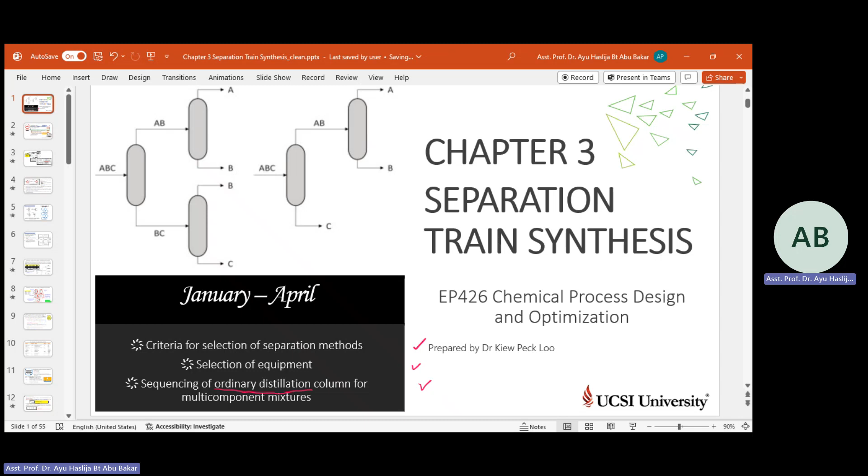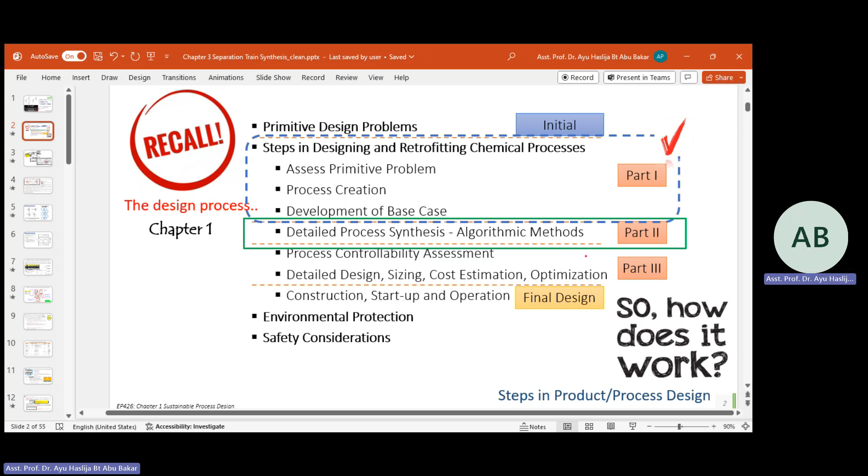Now, just to recall, we had done in previous chapter, part 1, part 2, the initial part and part 1. Now we go for the detailed process synthesis, which involves the separation part.

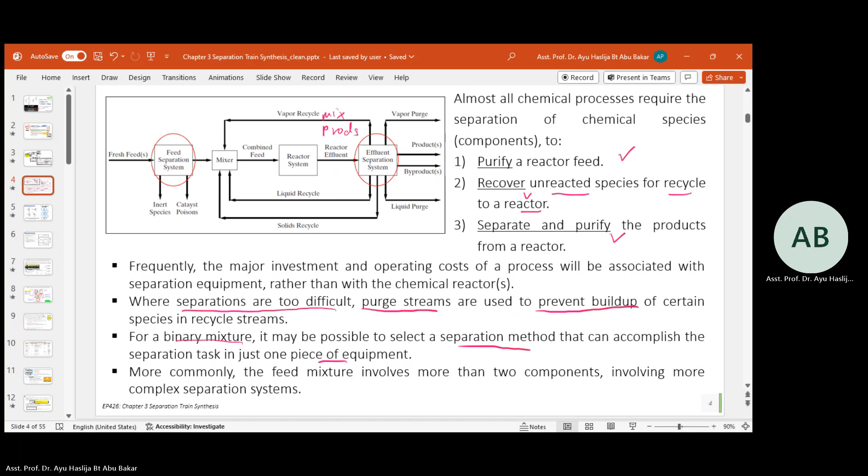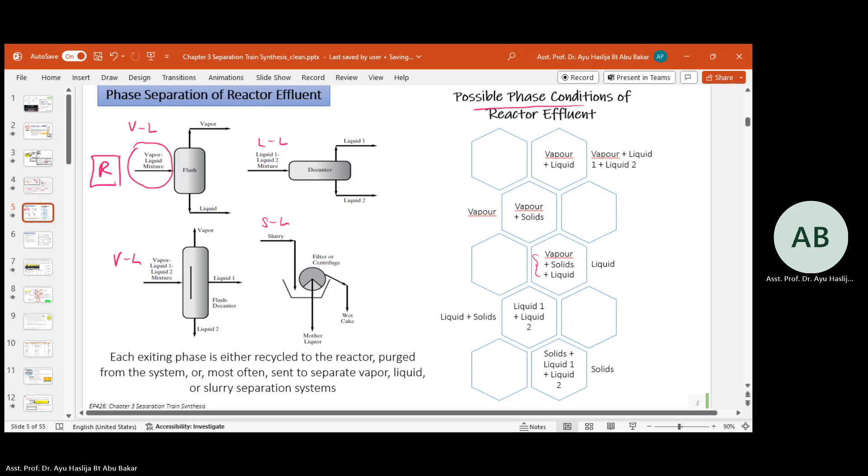Your PFD, have you sketched your BFD yet? Then so far, what is your product after the reactor, the phase? After your main reactor, the phase of the product - liquid, liquid, mixtures of products - liquid, liquid lah. Okay, so liquid, liquid.

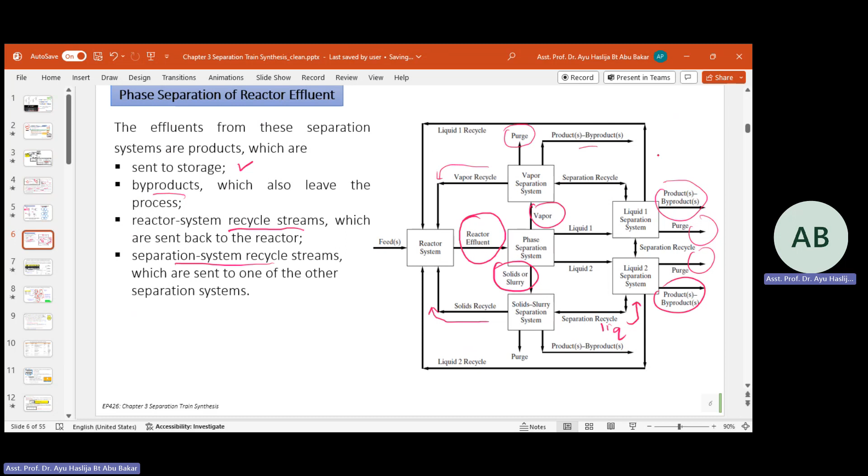So liquid goes to here - liquid, so perhaps here have mixtures of liquids. So after going through a few separation systems, you will have your products. As overall, this is your input, and all these effluent streams are your output.

Again, it depends on your effluent, reactor effluent phase. If you only have vapor phase, then choose the separation equipment that is suitable to separate the vapor.

Okay, up to there? Can I?

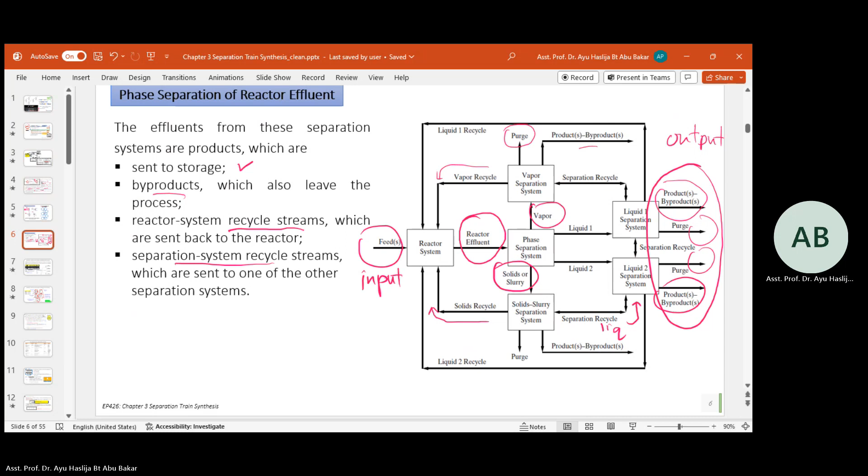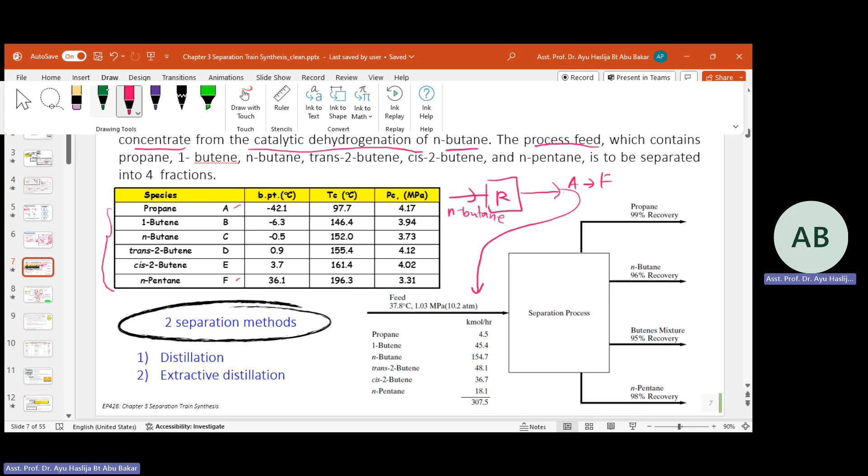Your main target is to recover the butenes.

Your mixture, you have a few: propane, 1-butene, N-butane - this is the unreacted reactant - trans-2-butene, cis-2-butene, and N-pentane. So your target is to recover butenes.

Means B, D, and E - butenes.

How many carbons in butenes? Four. Single bond, double bond. Double bond. Okay, butenes.

Now, target is to recover B, D, and E. Okay, here. This is the requirement from the question.

Now, how to separate them? You have 6 components in the feed with this rate, in kilomole per hour. Now, you need to find out the properties for each component in order for you to separate.

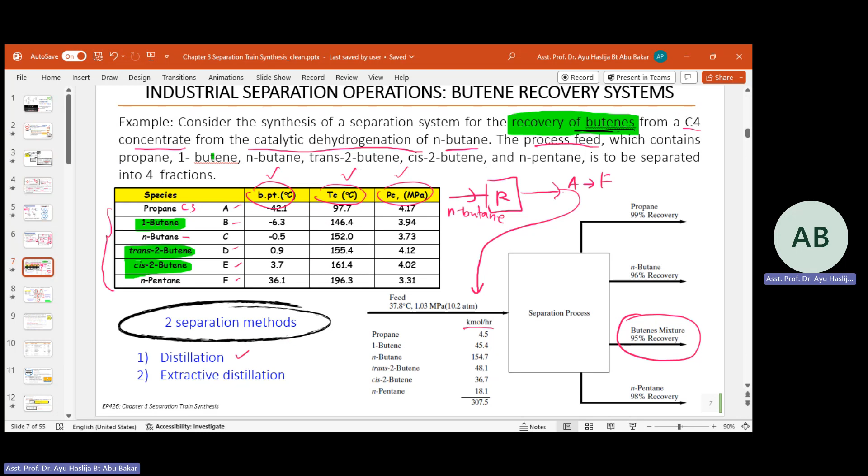Now, there are two separation methods proposed over here: distillation and extractive distillation. What are the differences between distillation and extractive distillation?

You have a few more types of distillation. But for these two, what are the differences? Okay. Which type?

Correct. Yes. Extractive is with the presence of solvent to help the separation process. Most of the time when it involves azeotropic or miscible mixtures.

Okay. Distillation, number one over there, is the general distillation system.

Okay, what are other types of distillation? Other types of distillation column that you know? What else, other than extractive?

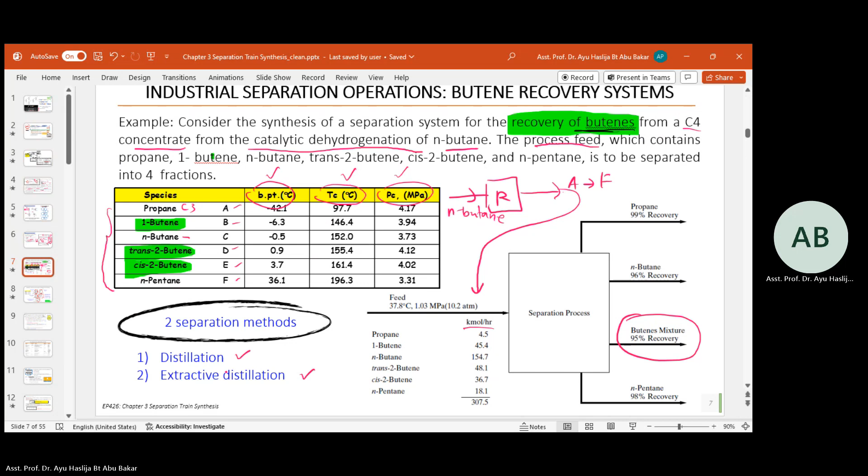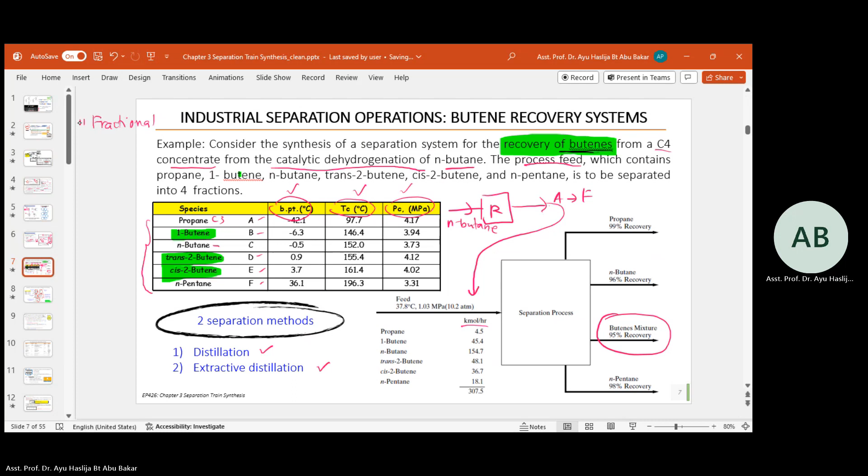Okay. Yes, fractional distillation. What else? Yes, reactive distillation, which we had gone through in previous lectures.

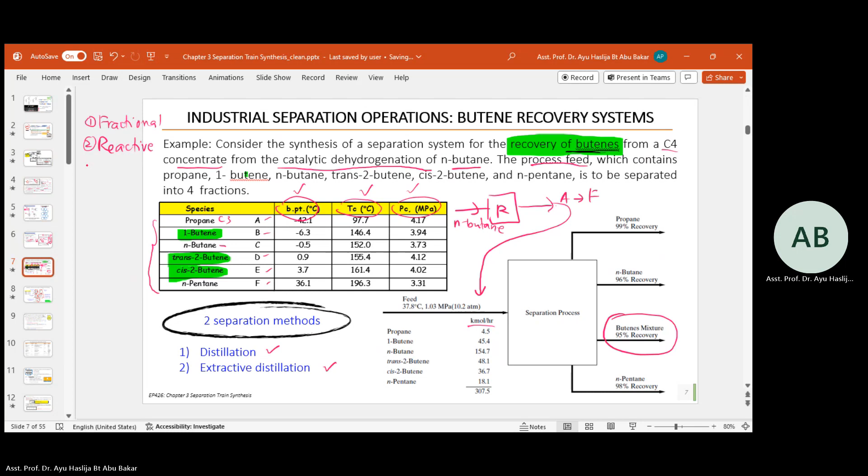Others? How about others? What type of distillation? No more? Huh?

PSA. What does PSA stand for? Pressure swing adsorption.

One kind of distillation, if you read through, it is one type of distillation as well. Sure.

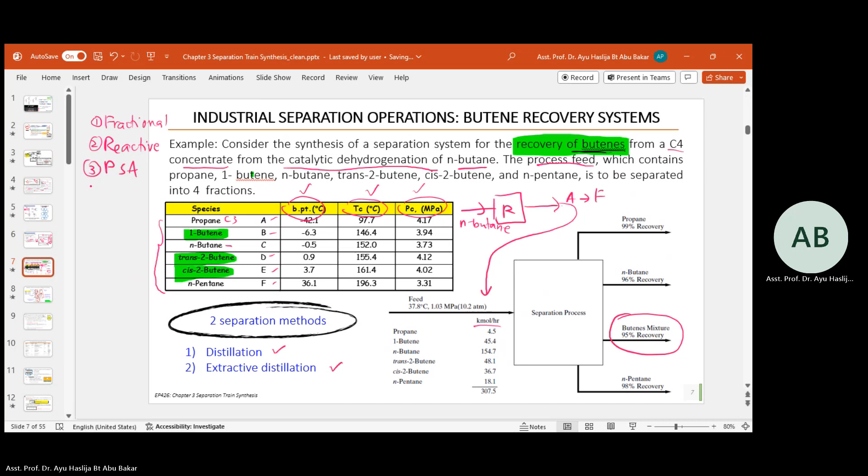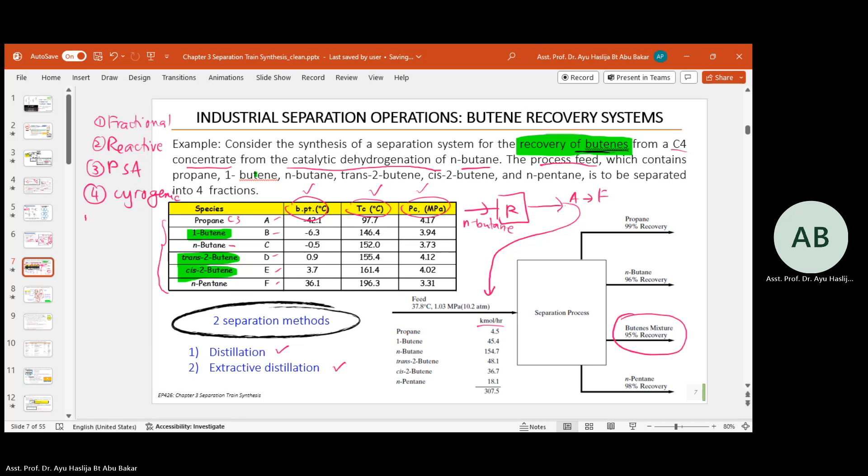Other than that, cryogenic. Cryogenic. Other than that, what else?

Okay, you can read through. If you Google, there are a few journals or websites that state few types of separation.

In your PDP, what type of distillation do you use? Simple distillation and extraction.

Okay, other group? What do you use? Type of distillation. Other group?

Jin, how about you? Now I know your name. What type of distillation column does your group use? Same group? Do you use a distillation column?

PDP. No distillation column. Good. What type? Not sure. Fractional distillation.

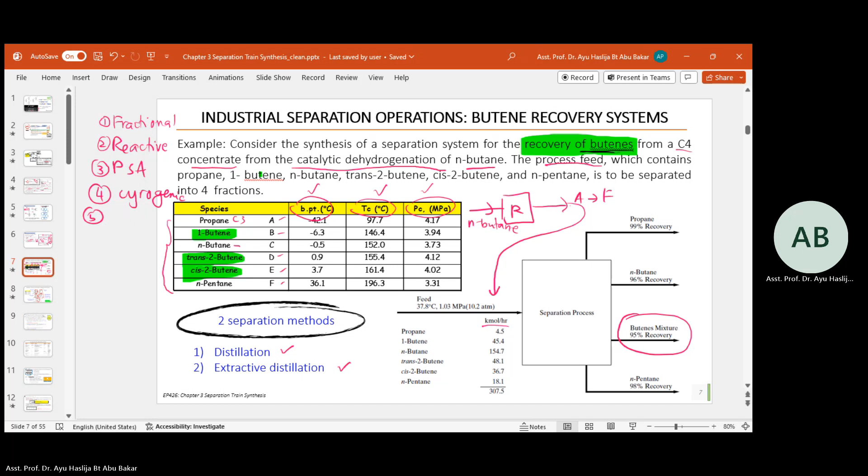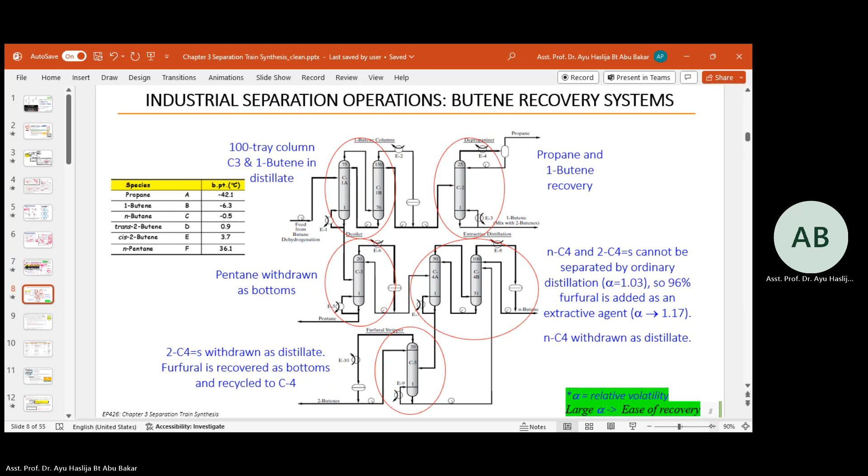I want to highlight how it separates a few distillation systems, a few separation systems, in order to focus on recovering the butenes.

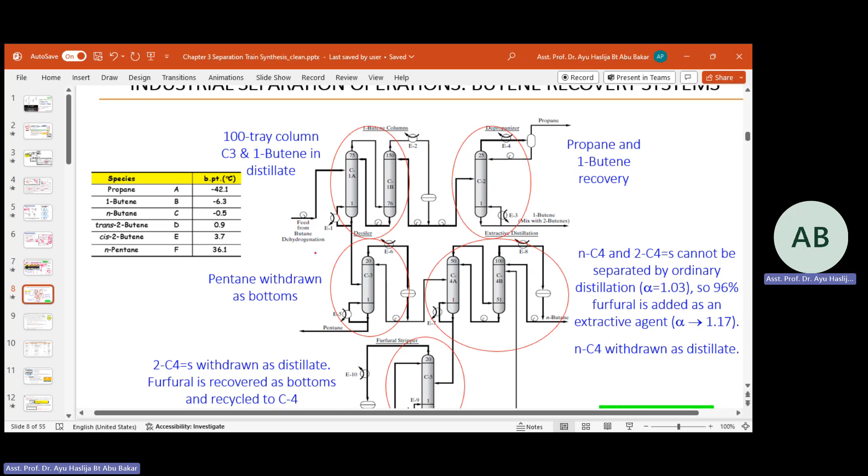Okay, here the main feed. This is the main feed just now that consists from A to F. Okay, here A to F. The main feed now enters the first separation system, where C3 and 1-butene is in the distillate.

C3, 1-butene in the distillate. Now you have two components which you need to separate further to extract out the 1-butene. Then it goes to another separation system.

Okay, then you will have your butene and propane from this sequence. This sequence gives you propane, C3, and 1-butene.

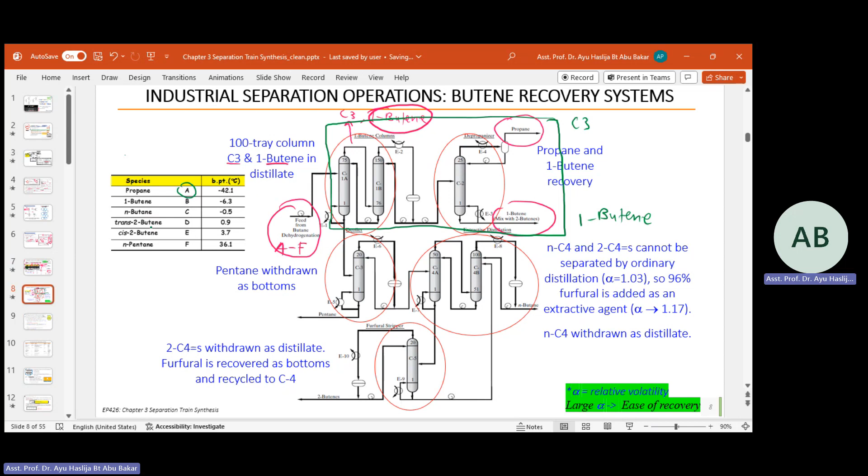Okay, up to there. Now the first sequence distillate is C3 and butene - propane, A and B, 1-butene. Okay, so the bottom product, what could it be?

Distillate is A and B. Bottom here? The rest, right, C to F. Okay, bottom here, the one that enters the next separation system.

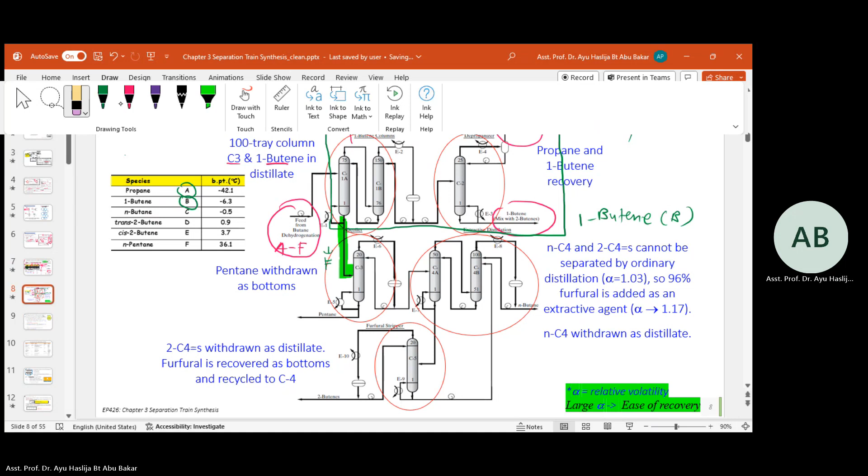Okay, so here it consists of C until F. C until F enters the second separation system. Now from here, focus on the notes over here. NC4 and 2C4. NC4 here is the C, n-butane. Okay, NC4, C.

2C4 is what? The trans and cis butene, D and E. 2C4 here, trans 2-butene and cis 2-butene. Okay, cannot be separated by ordinary distillation because their relative volatility is 1.03.

The relative volatility represents the ease of recovery. The larger the relative volatility, the easier the component can be recovered. So here, small value of relative volatility, so this C, D, E is hard to separate. That's why 96% furfural is added as an extractive agent.

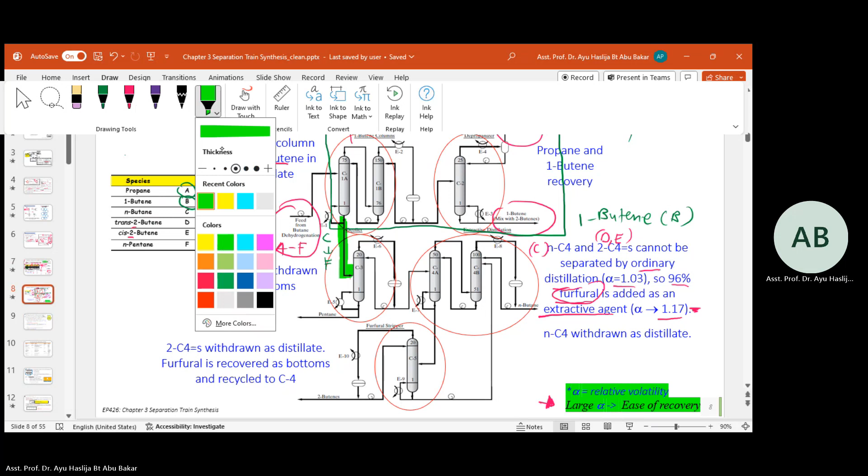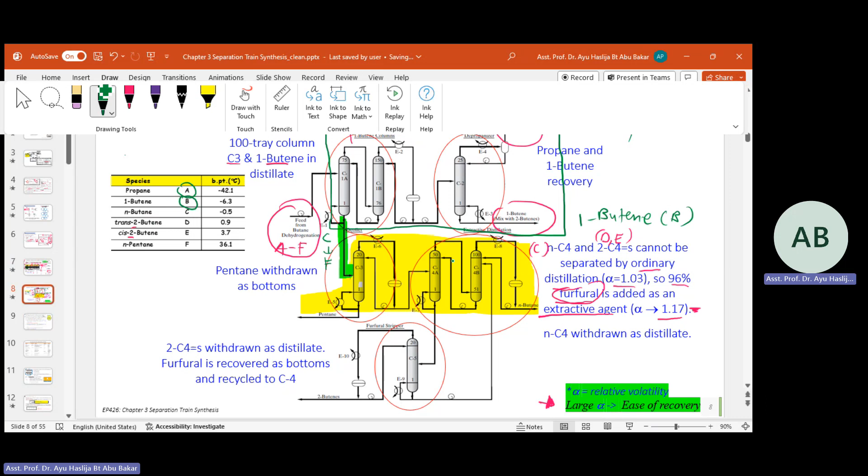This second separation system is using extractive distillation, because the C, D, E is hard to separate. So they use extractive separation, extractive distillation. Okay, now the pentane is the bottom over here.

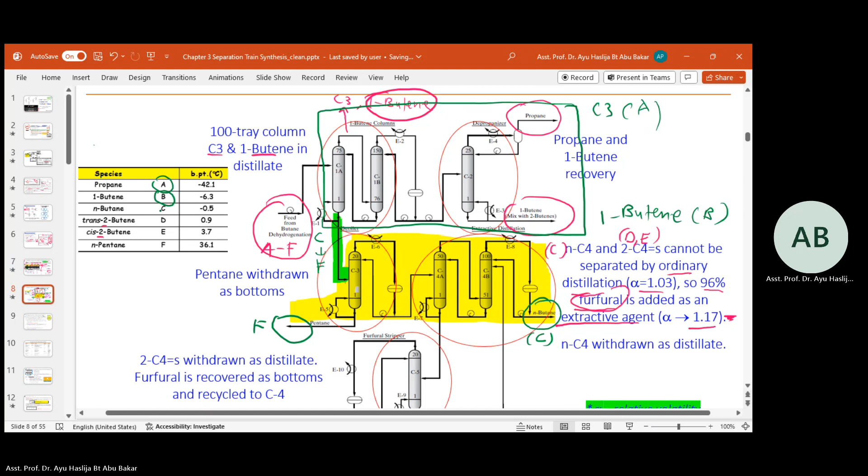This is N-butane, right? N-butane is the distillate. C, D, E, F. Okay, so C, N-butane, release over here. Pentane is the F. Where is DE?

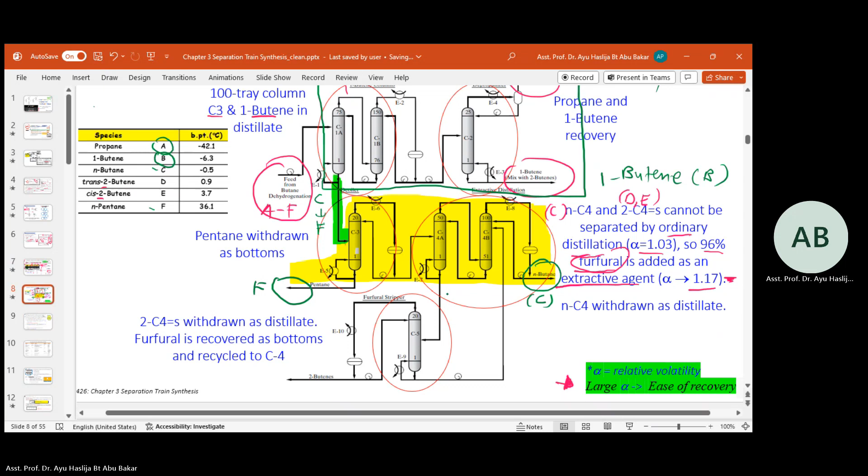Okay, D and E, just now, because it is hard to separate, we add the furfural here. So furfural, D and E, two butenes. Here, D, E, two butenes. Now here is D, E plus the furfural.

Okay, it goes to the next separation where it separates the furfural and the D, E, the butenes. Okay, so here the furfural is being recycled back to C4B distillation over here. Let me write it nicely so that you understand.

Okay, here's, sorry not C, here is D, E, and furfural. Then the one that is being recycled back is the furfural. Okay, now you have recovered your main target, D and E, sorry, D and E, the butenes.

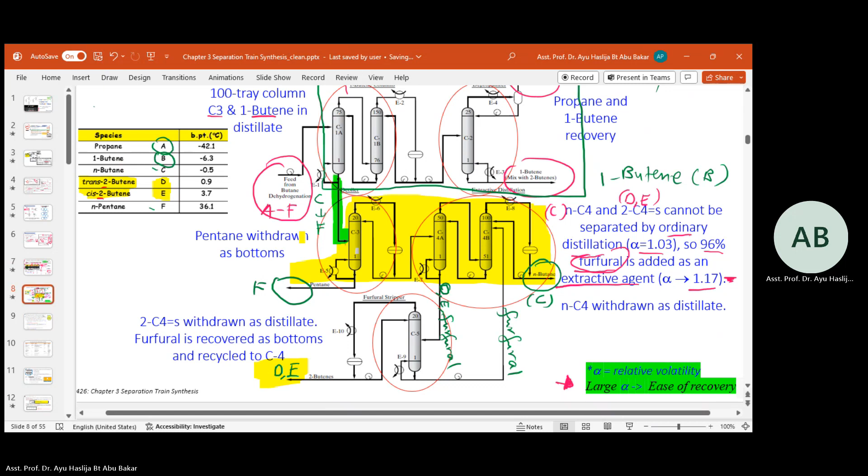Okay, 5 minutes for you to digest this separation system - how it flows, what is to be added.

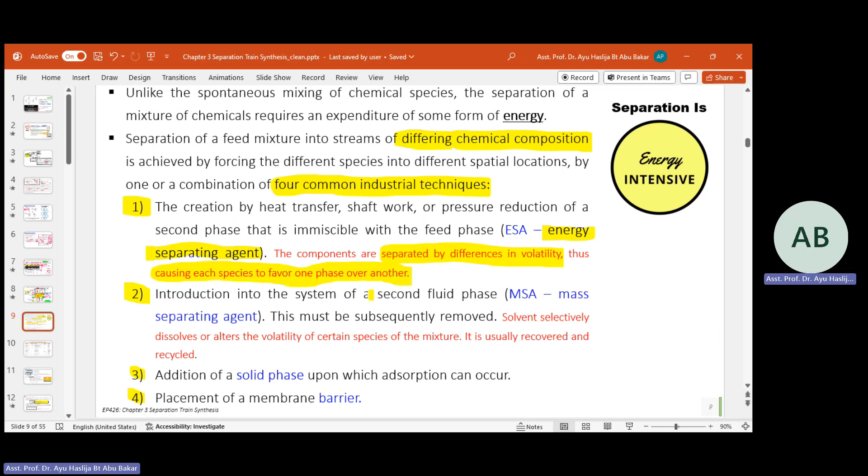Second one, introduce a second fluid phase, which is MSA - M stands for mass separating agent, ESA stands for energy. Okay, so the furfural just now, this system used MSA. Furfural is the MSA, mass separating agent.

Okay, the solvent selectively dissolves or alters the volatility of certain species of the mixture. It is usually recovered and recycled, similar to the furfural here - it is recovered and recycled to the previous column. So here again, the furfural is the MSA, mass separating agent.

The third method is the addition of solid phase, upon which adsorption can occur. So here you add solid phase so that the separation occurs in an adsorption process. This one is the PSA, pressure swing adsorber.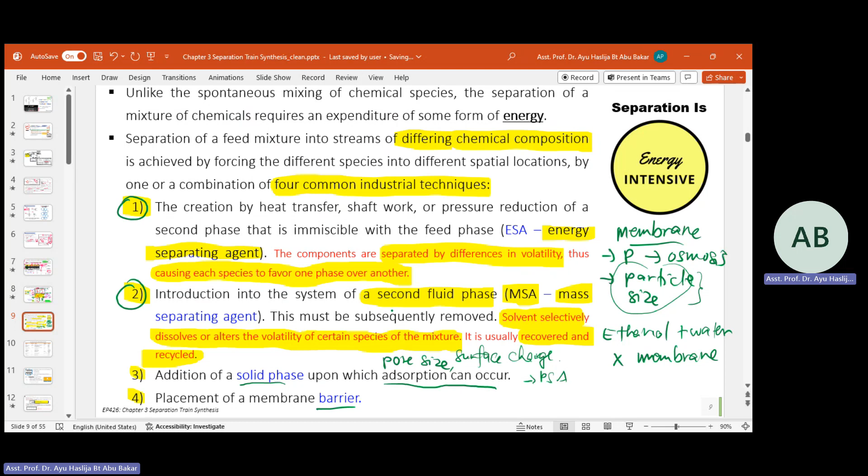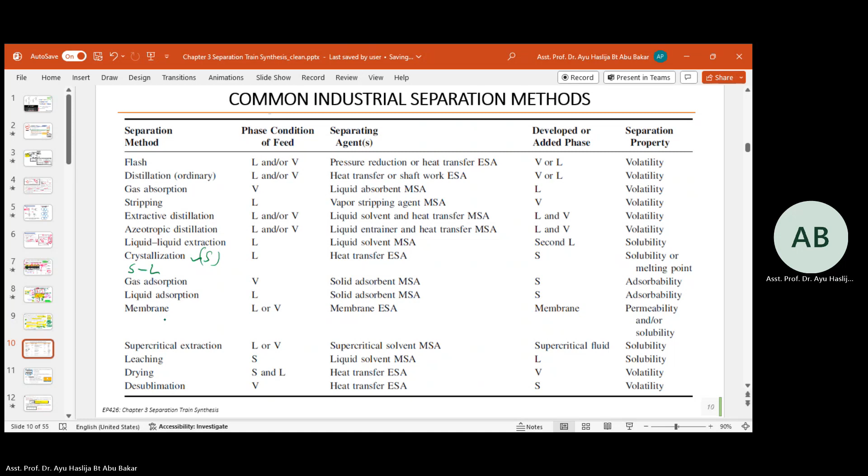It separates what? Crystallization, what phase? Solid and liquid. The feed is solid and liquid, so main product here would be the solid. Okay.

Now here, criteria for selection of separation method. Which one to be used? It depends on the feed condition, either vapor, liquid, or solid. Okay, so if vapor, these are the common techniques for the separation. You can do partial condensation, distillation, absorption, adsorption.

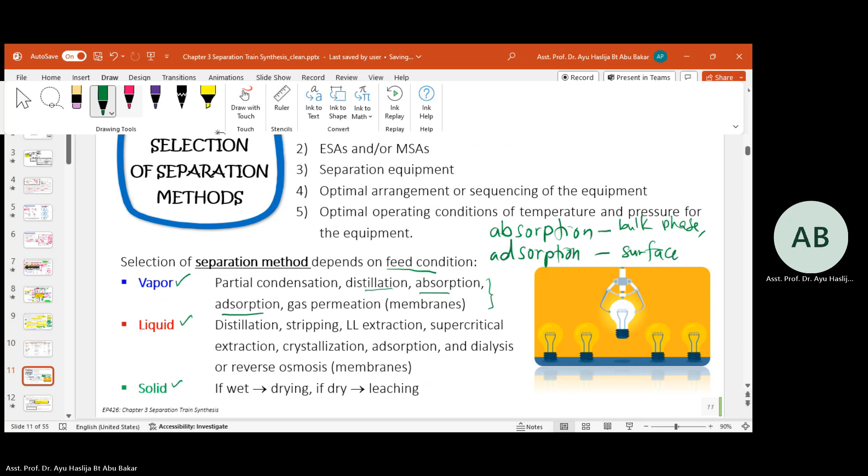What's the difference? AB and AD. Absorption and adsorption, what's the difference? What's the difference between these two? Okay, absorption involves bulk phase. Adsorption, on the surface only, yes. Absorption, it passes through, in bulk phase. Pass through, sorry, not phase, pass through. Pass through surface.

Okay, absorption, for example, we have this. So your solution can pass through. Pass through. It passes through. This is absorption.

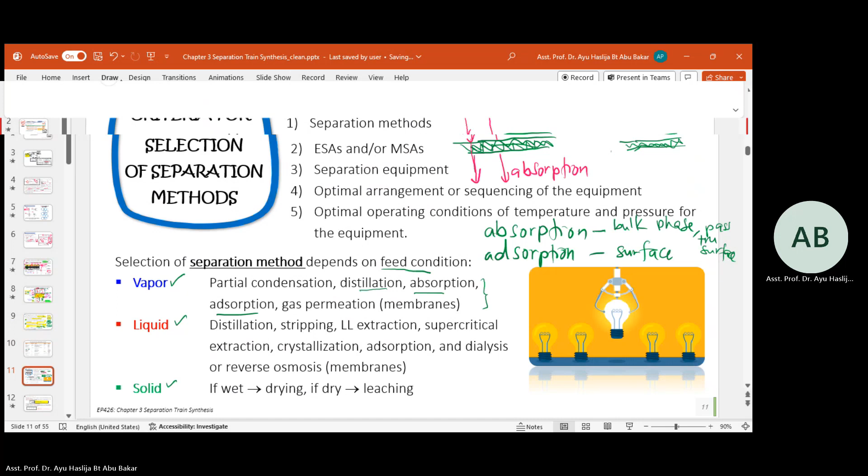But if adsorption, it plays on the surface, the solute particles attached on the surface. Okay, the solute attaches on the surface. Adsorption. Absorption, it passes through; the solute passes through the film or whatever that you are using. Adsorption, on the surface only. Okay, it attaches on the surface.

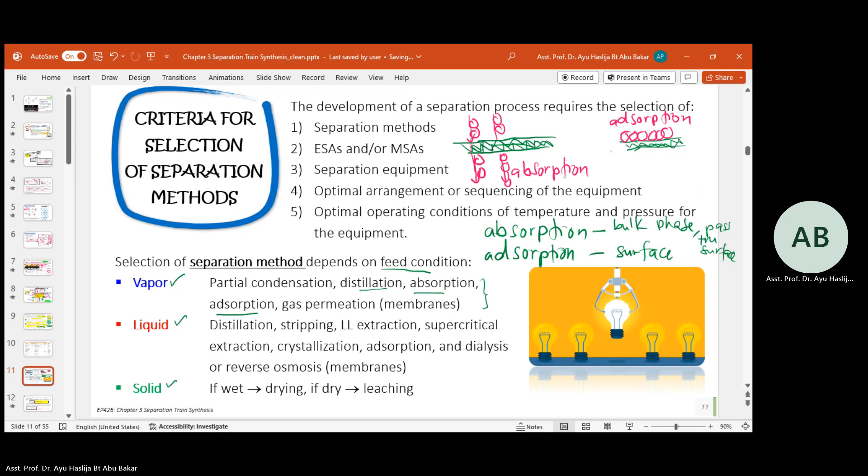Okay, so in the separation method selection, we need to consider the separation factor. Okay, which defines the degree of separation achievable between the two key components. Between the two key components, degree of separation, similar to the relative volatility just now.

Okay, from the equation over here, the formula over here, you can see separation factor is equivalent to the relative volatility of the component. Okay, relative volatility high, easy to separate. If relative volatility low, hard to separate.

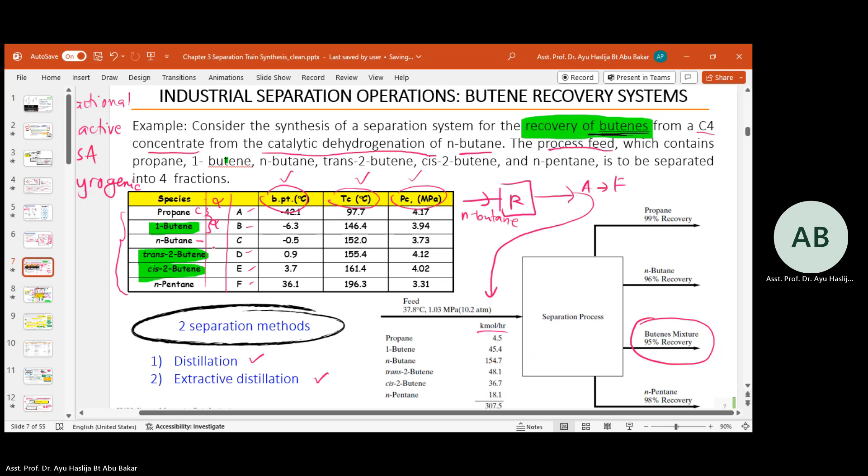Okay, this relative volatility involves between two components. Let's say just now, here you have 6 components. So the relative volatility involves between two components. So it means over here you will have a few values of relative volatility. Perhaps you should have another column which mentions the relative volatility between the components. Okay, maybe between propane and butene, so it has its own relative volatility. Butane and this, between two components. Okay, we'll go through examples so that you understand later.

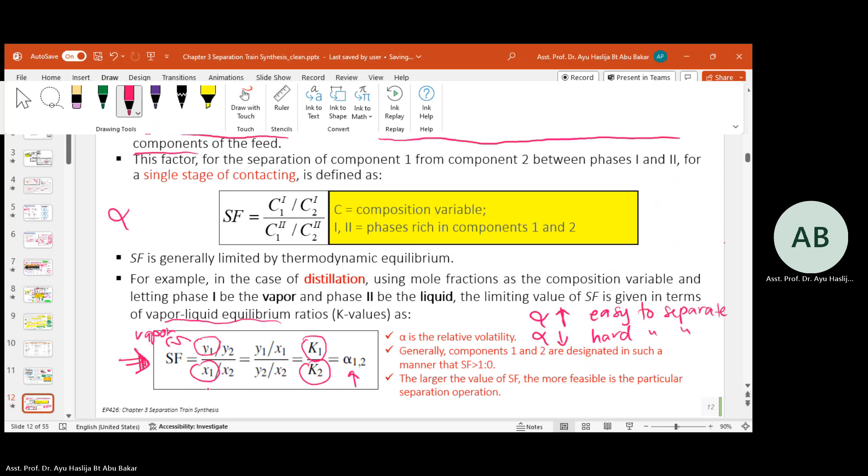Now, how to find this relative volatility? It depends on the K values - vapor liquid equilibrium ratio for component 1 and component 2. It also depends on the phase, vapor or liquid. This one is in vapor phase, this one is liquid phase. In thermodynamics, Y is always used for vapor, X is always used for liquid. So it always represents similarly: Y for vapor phase, X for liquid phase, of each component.

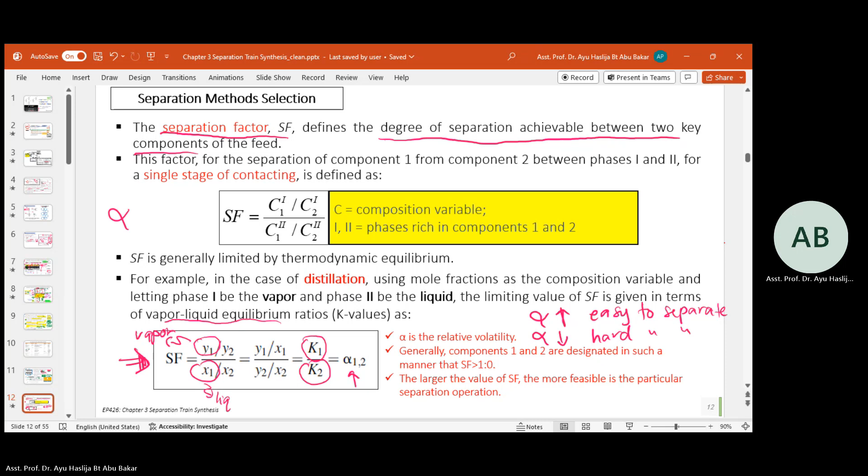Separation factor is equivalent to relative volatility for vapor-liquid separation operations that use MSA.

That causes the formation of a non-ideal liquid solution, because you already add in the MSA. For example, just now the furfural being added to D and E.

Now, operate at near ambient pressure. Based on Raoult's law, this is the equation. This is for you to understand only how it relates.

Now if the MSA is used to create two liquid phases, such as in liquid extraction, the SF is referred to with relative selectivity, beta. The alpha just now is relative volatility.

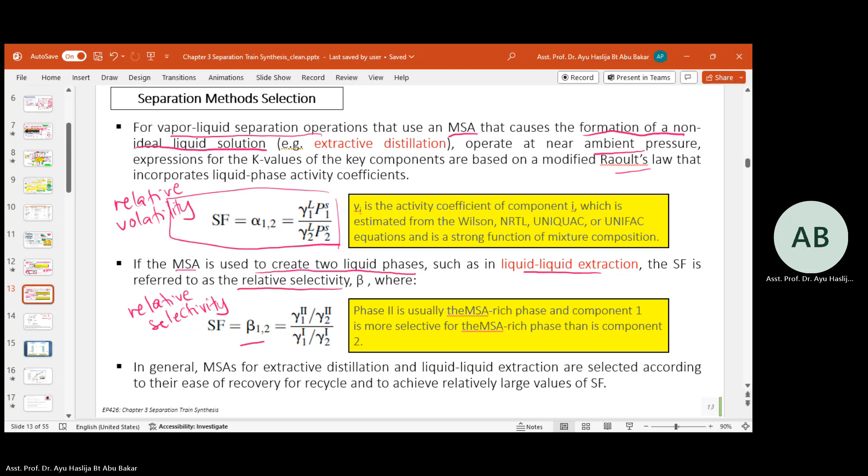For example, over here we have the feed. This one I extracted from this journal, this figure. Now here we have the feed, which is ethanol and water.

We know that the boiling point of ethanol is 78, water is 100. Closer boiling points, close boiling point, so it is hard to separate. So you choose the extractive distillation column by using MSA.

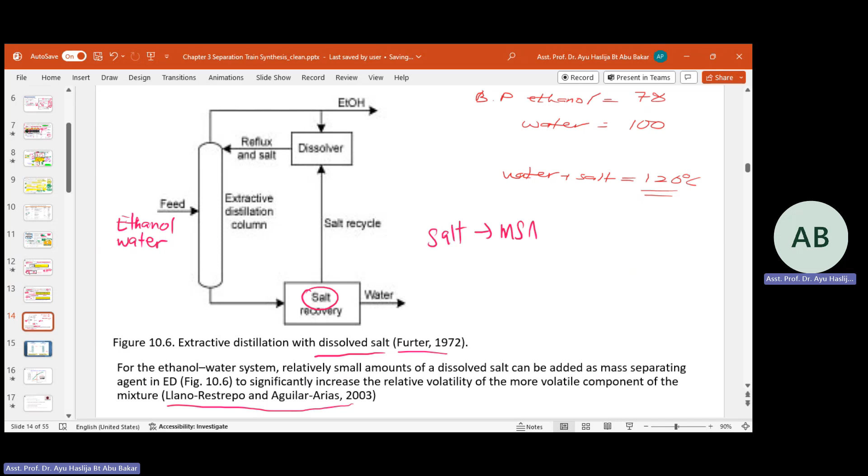What is the MSA agent here? Here it is the salt. Salt is the MSA agent. How does it work? It will increase the relative volatility of the more volatile component in the mixture.

So when salt is added to water, the boiling point will increase, right? If you boil normal water, it will boil at 100 degrees C. But if you add salt, it will boil at a higher temperature, because of the salt inside it. So the salt already changed the properties of the solution.

So here the salt acts as the MSA added to the feed, making it easier to separate them. Over here, the relative volatility will increase, similar to the furfural just now. So instead of the boiling point being between 78 and 100, now you have between 78 and 120. So perhaps you can set the temperature of this distillation column at around 90 degrees C, so it won't boil the water, but it will vaporize the ethanol.